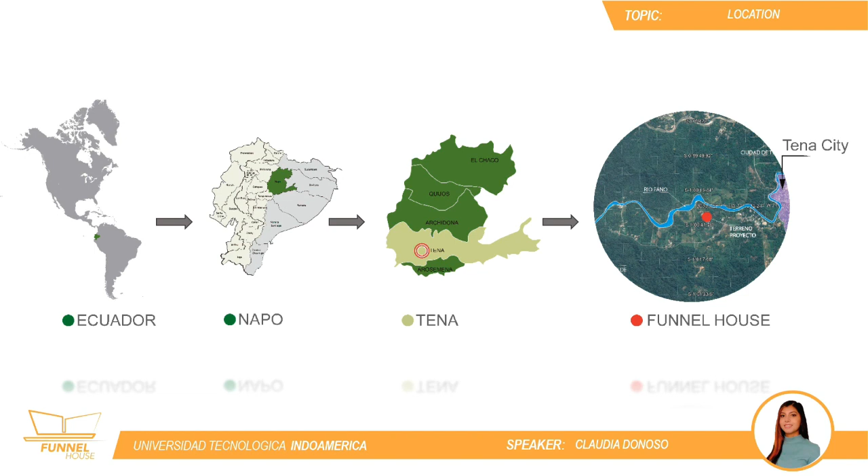Funnel House is located in Ecuador, in the Amazon region, Napo Province, Tena Canton, Pano Parish. The lot is located 4 kilometers away from Pano Town and 4 kilometers away from Tena City, right in the middle of both. This project enjoys a privileged location, surrounded by one of the richest ecosystems on our planet, the Amazon rainforest.

The importance of this ecosystem has led us to think more closely about the environmental impact that the construction industry can have. The borders of the Amazon are inhabited, with growing cities in the middle of nature. It is very important for our future to establish a sustainable relationship with the urbanized regions of the Amazon, to guarantee the protection of its natural regions.

Tena Canton is made up of one urban parish, also called Tena, and 6 rural parishes. Our project is located in Pano, rural parish. Tena Canton has approximately 60,880 inhabitants and a population density of 234 inhabitants per square mile, and a surface of 1,507 square miles. Population settlements are scattered and small, settled mainly along the banks of the Napo River and on the outskirts of the urban parish of Tena.

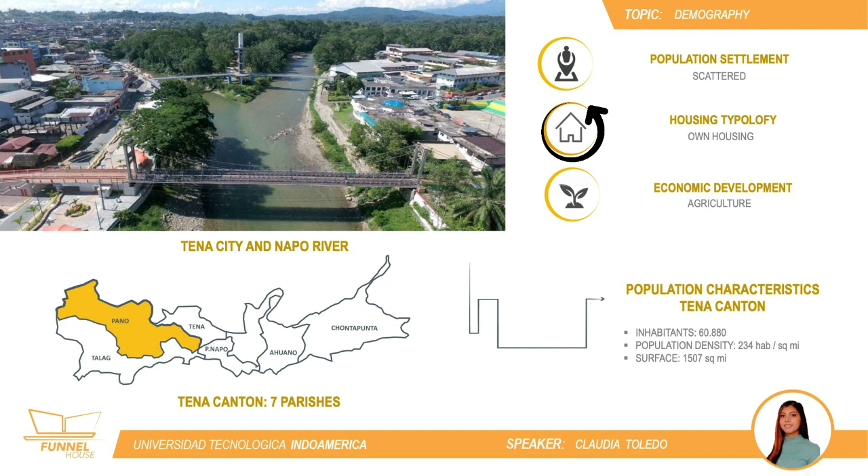Its economic structure is based on agriculture. In the image, we can appreciate the city of Tena, crossed by the Napo River. The population in Pano is mostly young. Around 80% of the people are between 15 and 45 years old, being an important potential client for housing. The families are patrilocal, meaning that the wife moves into the husband's parents' house and is considered a part of that family. For this reason, our project has a progressive growth potential.

More than half of the families in the sector own a house, for 3 to 4 dwellers, which represents a significant market potential for our design and an important chance for its replicability. The following image shows an average house in Pano. 81% of the roofs are made of zinc plates, and 78% of the constructions are made of wood. The cost of this 1,200 square feet house ranges its price from $36,000 to $48,000. We should consider that this type of house does not meet the environmental quality and comfort standards.

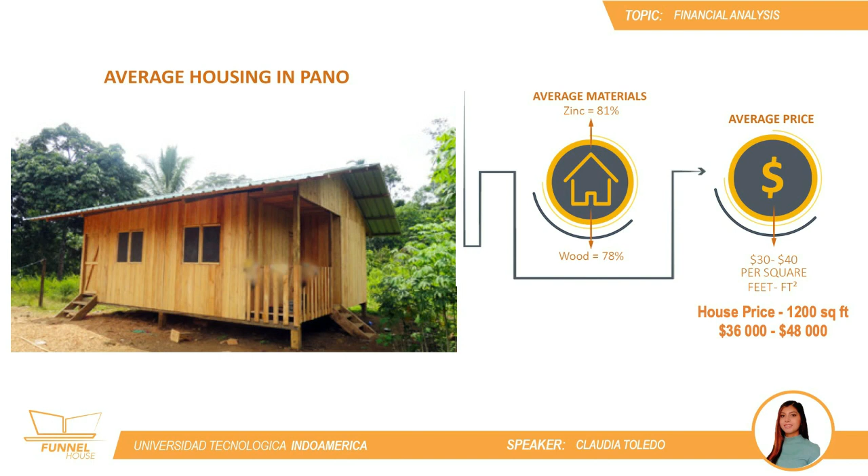Our team carried out 80 surveys with potential clients in the project's area. It was determined that the majority of the potential clients, 65%, are willing to pay between $70,000 and $110,000 for a 1,689 square feet house, the size of our project. After the analysis, it was concluded that an average dwelling in Pano does not meet the needs and characteristics of its clients. Also, our potential clients are willing to pay more for a house with better conditions.

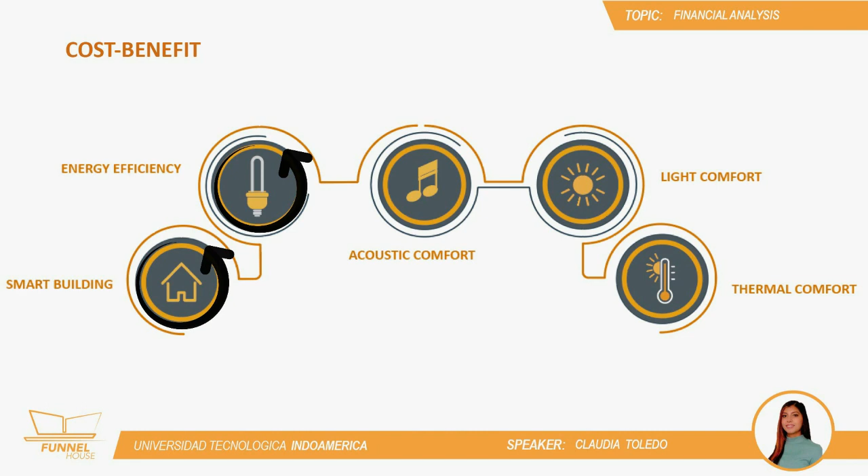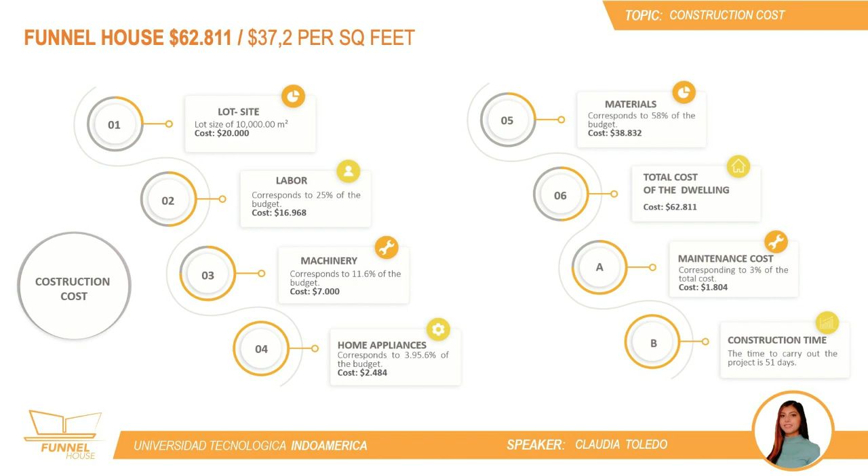A detailed budget calculation of our project was performed, establishing a final cost of $62,811, $37.2 per square feet. This includes lot, labor, construction, machinery, appliances, and material costs, shown in the points 1 to 6.

The design process included 4 phases. First, the environmental and user conditions were analyzed. In the second phase, passive strategies such as morphology and orientation were optimized to achieve the desired comfort. The third phase included technologies analysis and implementation to improve environmental quality and comfort. Finally, a coherent architectural expressiveness was defined, mixing vernacular and contemporary architecture.

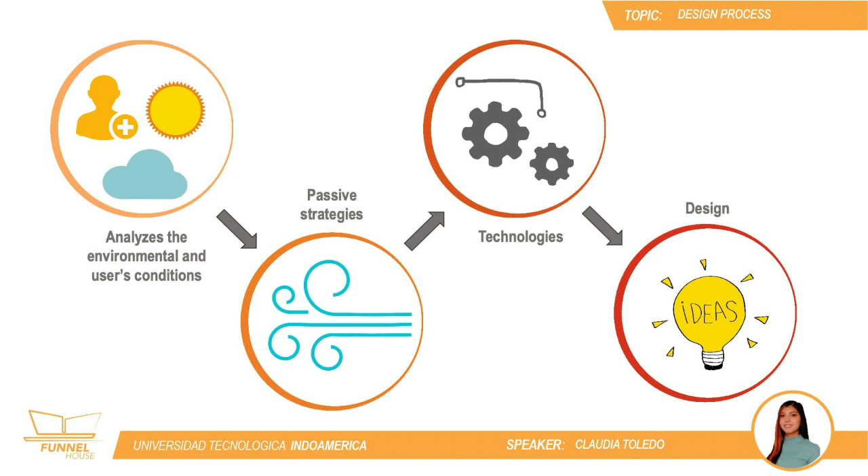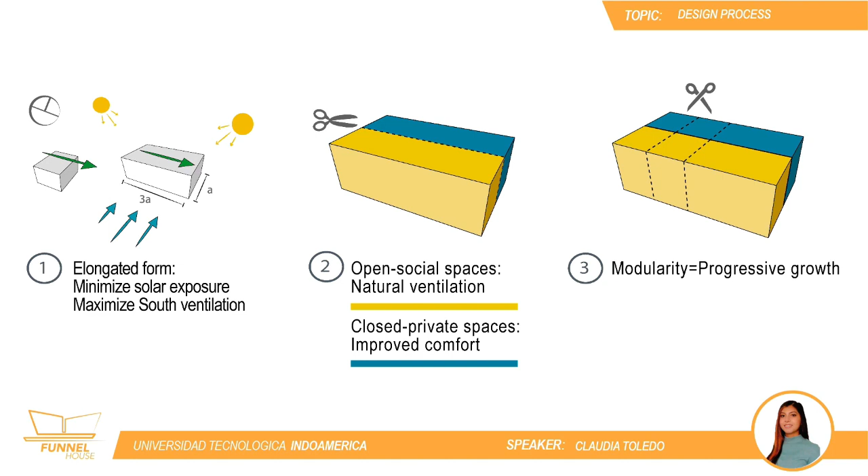Funnel House has an elongated form to reduce solar exposure from east and west. Its form also optimizes the capture of the south prevailing winds to maximize natural ventilation. The architecture program was divided into open spaces with permanent natural ventilation and closed private spaces with mechanically improved comfort. The project was modulated to allow progressive growth.

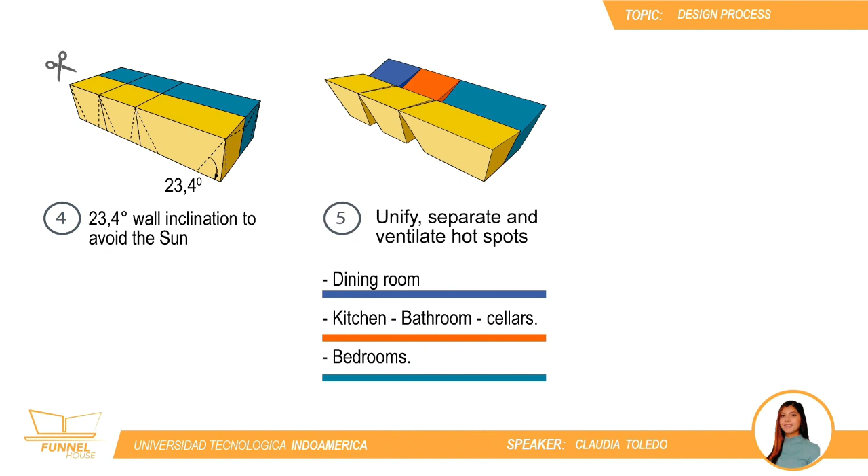In Ecuador, the sun reaches an inclination of 23.4 degrees during the solstices. The north and south walls were tilted at this angle to avoid sun incidence and decrease thermal gains. The other walls were also tilted to avoid the sun from east and west. The hotspots like kitchen, shower, and machinery room were unified into one module, separated from the others, to be ventilated and avoid heat transfer. Finally, the building was raised from the ground to allow circulation under it, avoid possible floods, and prevent the entry of wild animals.

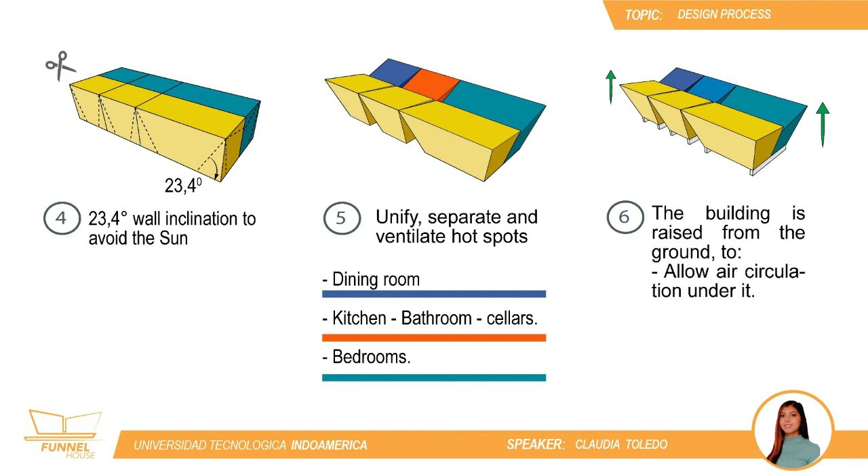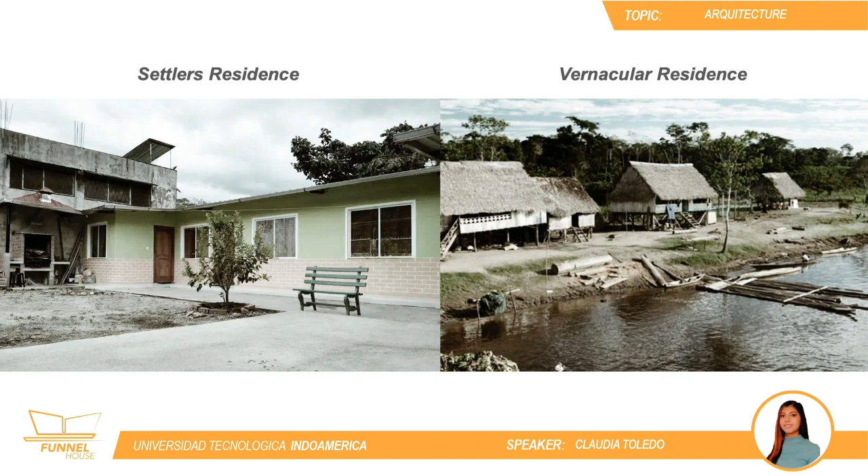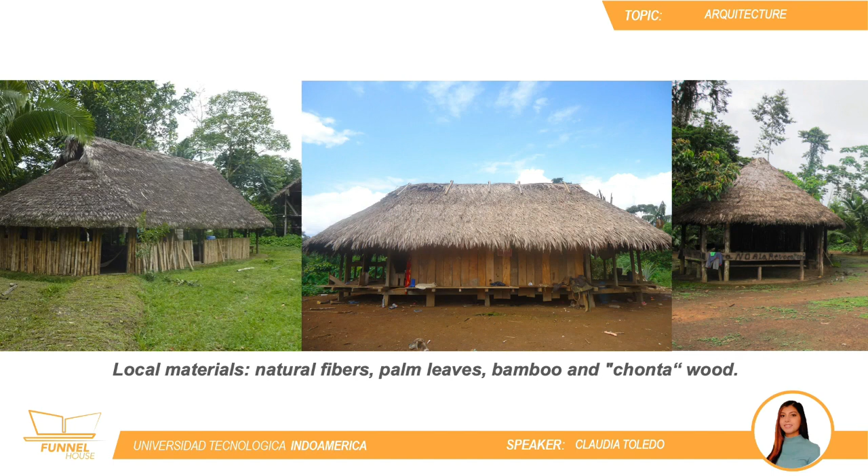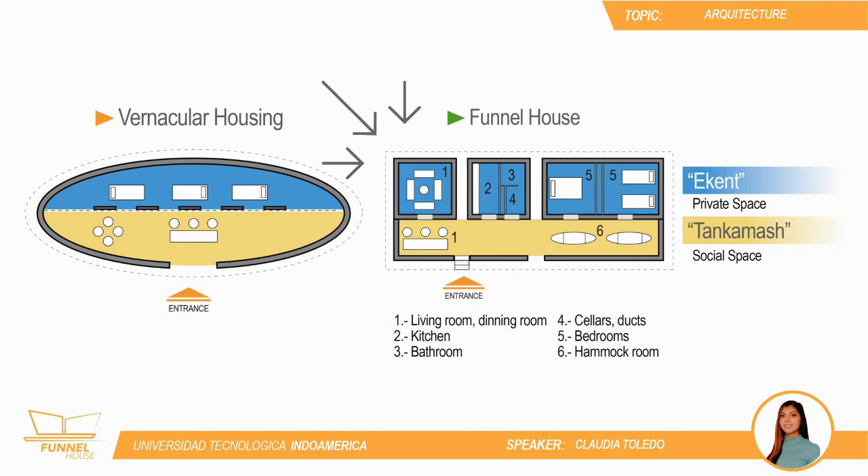Vernacular houses are built with local materials, such as natural fibers, palm leaves, bamboo, and chonta wood. The wall layers are placed vertically outwards and horizontally inwards, separated from each other to allow natural ventilation. Our project takes this idea of distribution and reinterprets it, as can be seen in the diagram on the right. In this way, its functionality adapts to the customs of the inhabitants of this region.

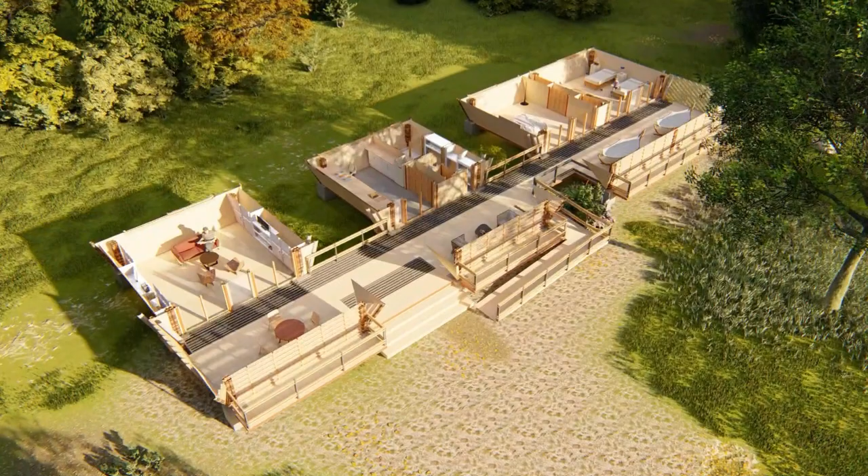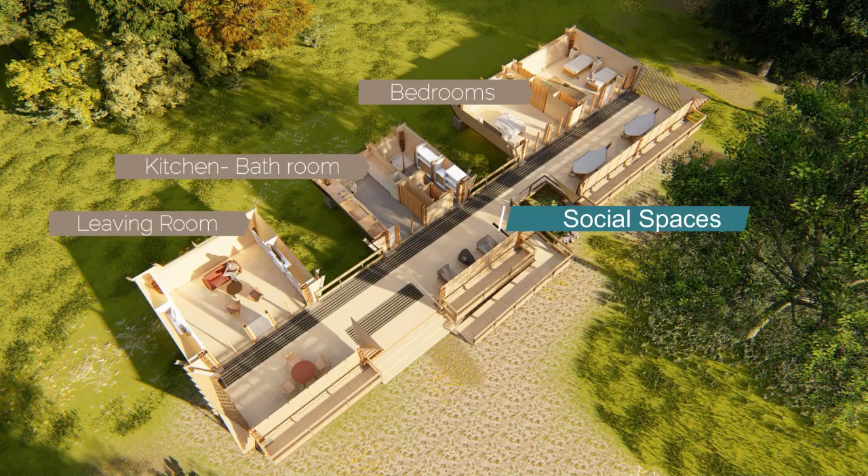Funnel House reinterprets the strategies developed by vernacular architecture. The house is divided into three modules, connected by a semi-open hall that includes circulation and social spaces. This hall also interacts with the gardens that help to regulate temperature and bring nature closer.

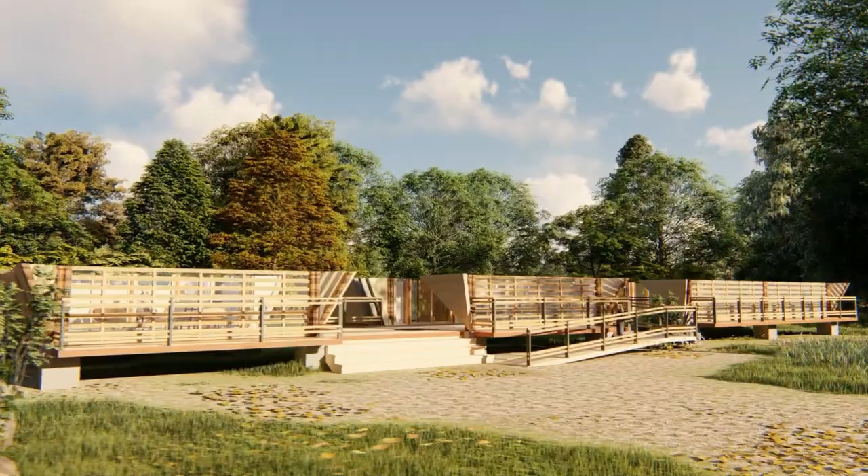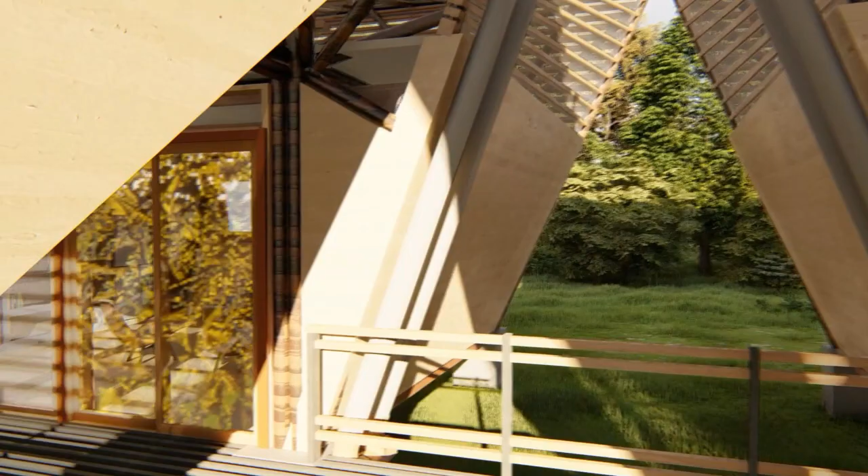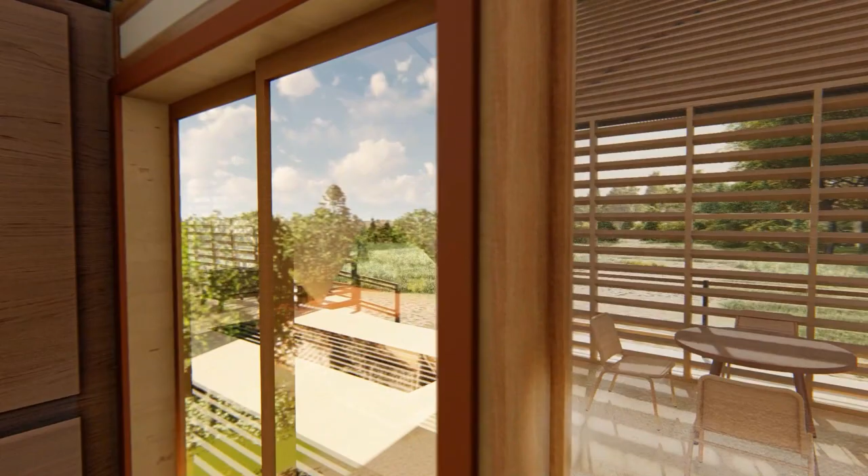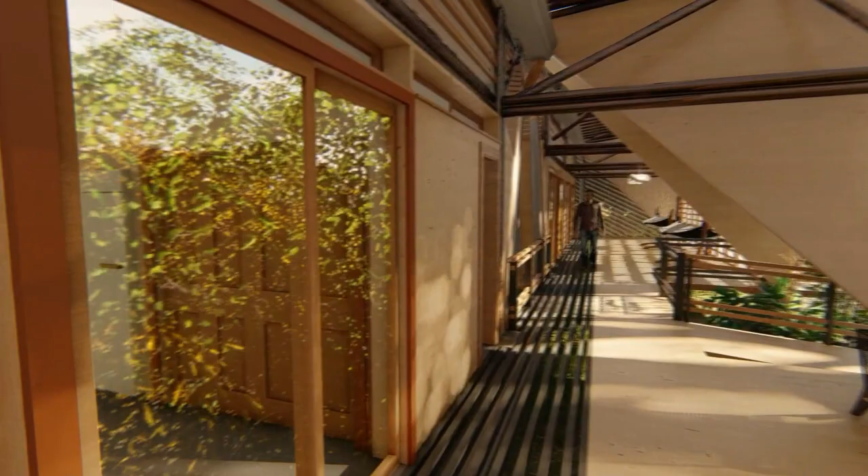The first module includes the living and dining room, located in two separate spaces that can be arranged into one to host social events. In the second module, we find the kitchen, bathroom, and machinery room.

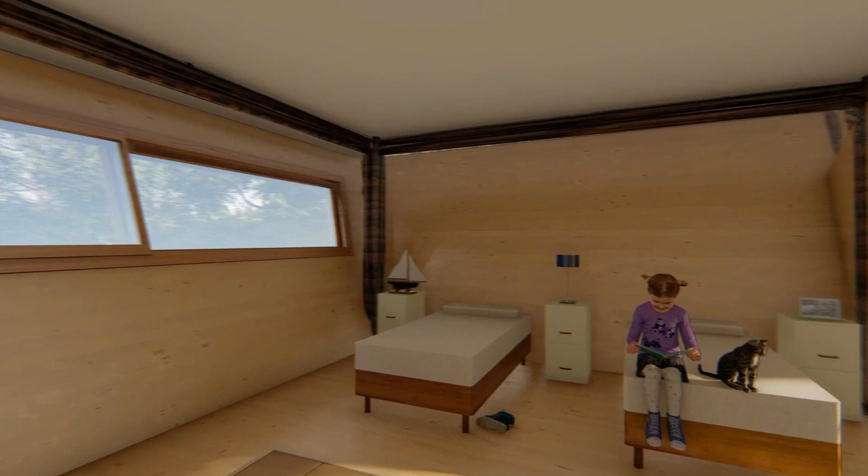Finally, bedrooms are located in the third module, each one equipped with built-in wardrobes and storage, and hammocks in the semi-open hall. The design, ergonomics, and accessibility meet local and international standards, providing an excellent occupant's experience and comfort.

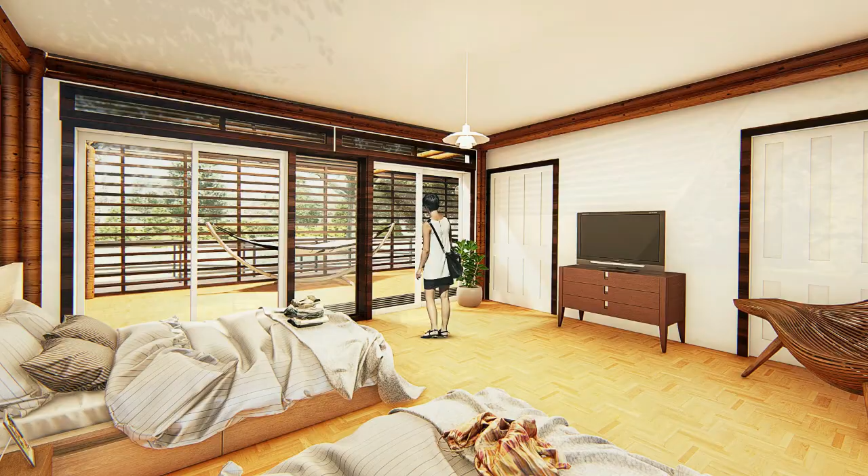Each module comprises two areas, a public area in the semi-open hall and private closed areas, isolated with several control layers to guarantee its comfort. The walls inclined to avoid solar radiation also help to accommodate the storage spaces.

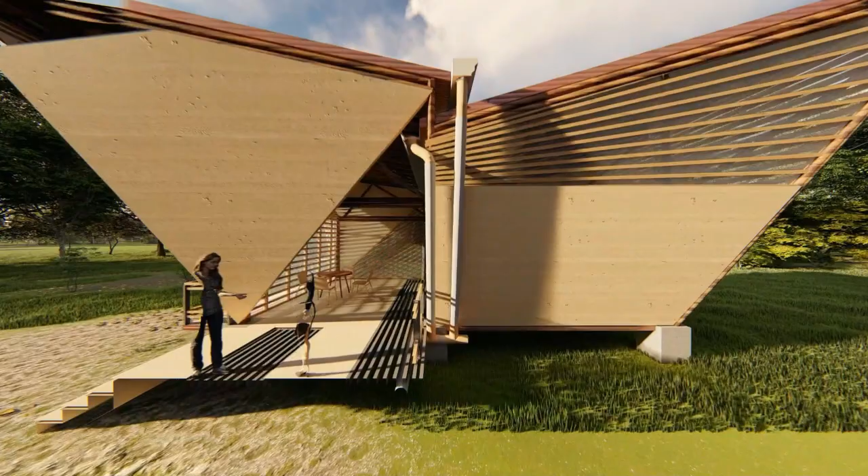Funnel House offers the highest life quality for its occupants. We used the International WELL Building Institute certification as a guide, analyzing 10 parameters. These parameters will be explained in the following sections. In order to reduce the energy consumption of the house, the project implements several passive strategies to maximize cooling.

1. The building is lifted from the ground to allow air circulation under the floor, cooling it down in the shadow. 2. The air carried by prevailing south winds is cooled down as it passes through vegetation. 3. Different vertical distances at the entrance and exits of air accelerate its circulation, improving natural ventilation. 4. Rain protection was carefully designed, allowing also rainwater collection on an underground tank for reuse.

5. The maximum sun inclination was used to calculate the inclination of the walls and the roof's eaves to prevent thermal gains due to solar radiation. 6. Cold air regulators on the ground floor allowed the entry of cool air circulating under the building. 7. Native trees surround the building to increase shading and air cooling. 8. The windows are designed to allow natural ventilation. They include anti-bug nets.

A mechanical ventilation system is implemented to reach the goal on thermal comfort. Due to the high relative humidity of Pano Parish, the mechanical system allows ventilation with variable flows depending on the humidity rate. This guarantees an appropriate quality of the internal air. The following strategies have been implemented.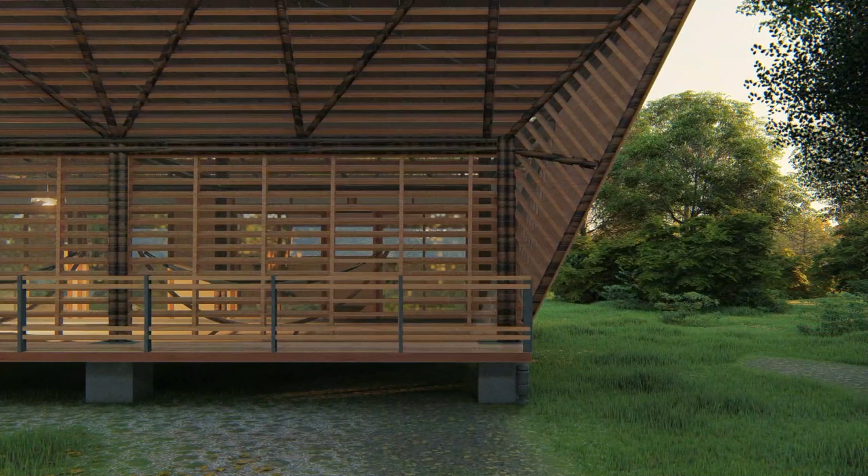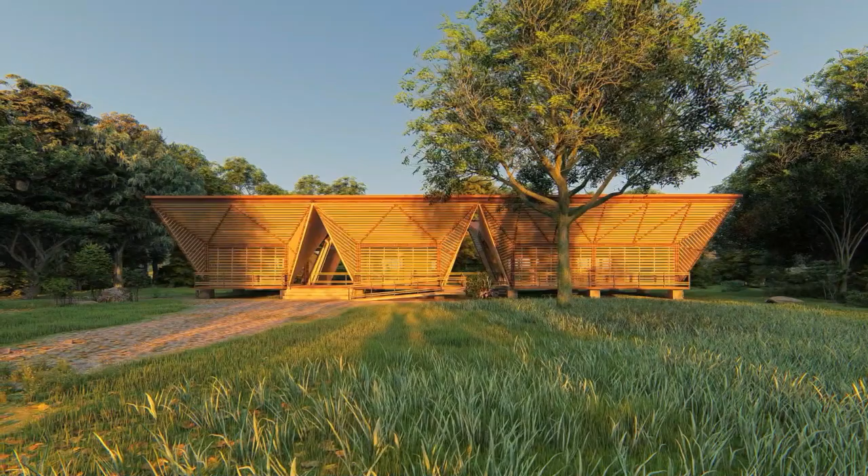The main challenge regarding thermal comfort for this project was the high temperatures and high relative humidity of Pano Parish. This solar analysis was very important to reduce its incidence on walls and indoor spaces. The wall inclination and roof eaves provide solar protection through the year to reduce thermal gains.

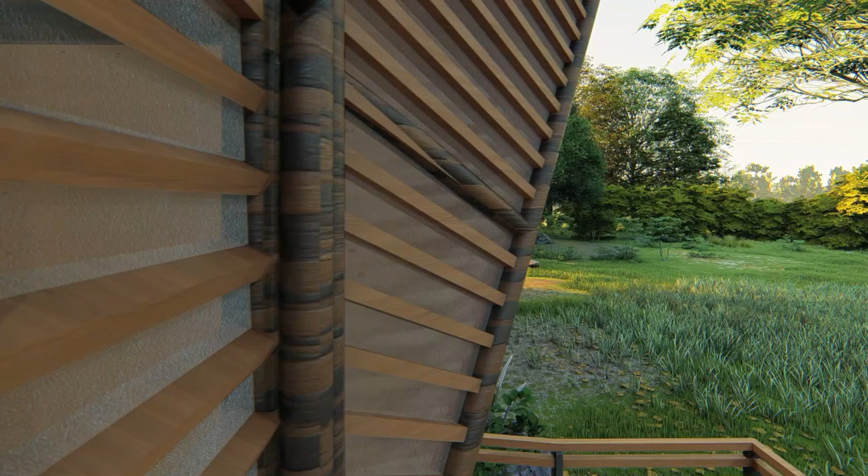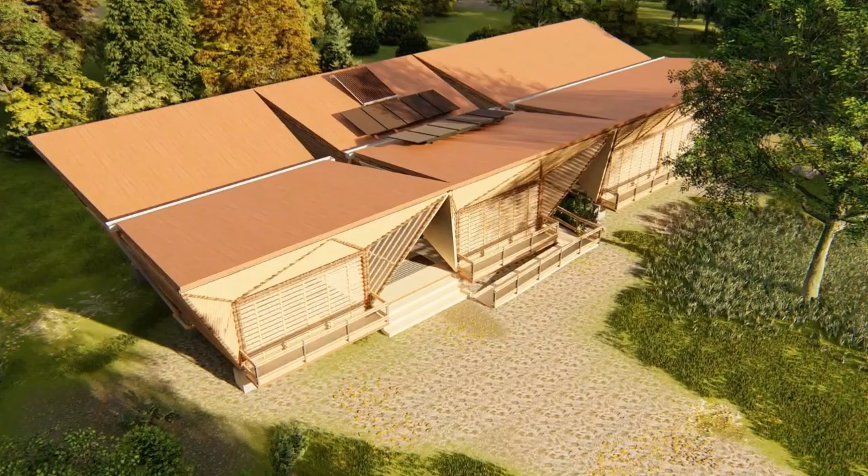Funnel House generates more energy than it consumes. Ecuador has a very constant solar irradiation throughout the year due to its location in the planet, with similar solar inclinations to the north and south. This house uses only electric energy, generated by 10 photovoltaic panels that produce 5,807 kilowatts per year.

Its energy consumption is 4,338 kilowatts per year, having an energy surplus of 1,469 kilowatts per year, which is returned to the grid to compensate the energy consumed during the night. J3M Company was a key partner to design this real market system.

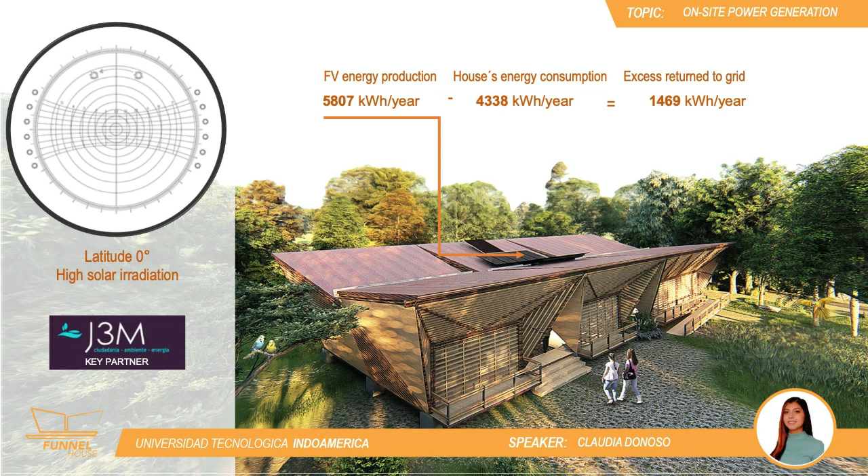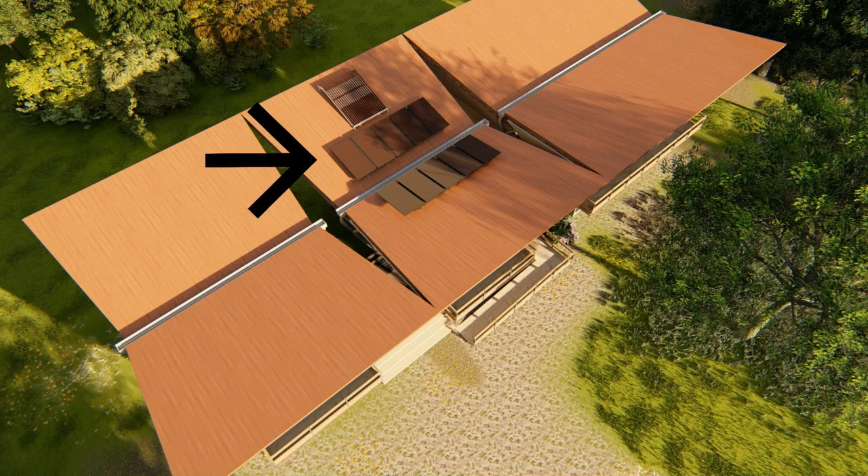The panels are equally distributed in the two roofs over the central module, with a seamless integration. The panels have an ideal 20% inclination to maximize energy production, which also allows self-cleaning by the rain. The graphic shows the energy simulation results using DesignBuilder.

Thanks to the passive ventilation systems used, it was possible to lower the energy consumption needed to guarantee thermal comfort for our users. This way, we avoided the use of air conditioning systems, which are very common in this context. The highest consumption is made by the hot water system. The desired thermal comfort inside the dwelling was defined to meet ASHRAE Standard 55.

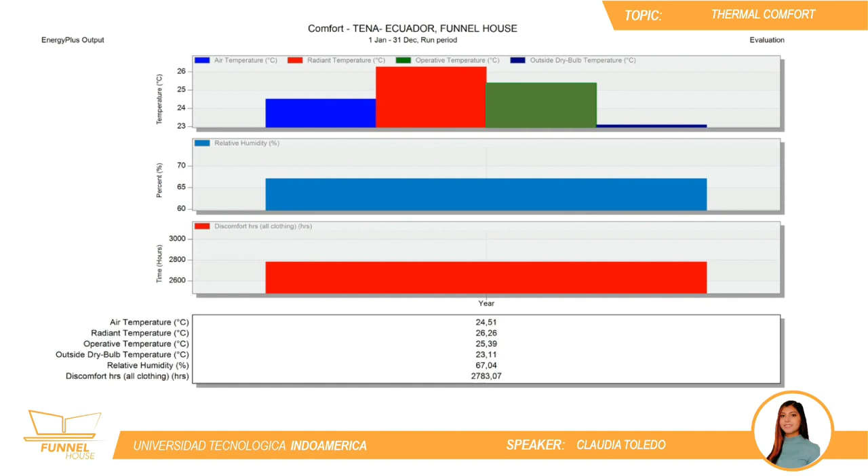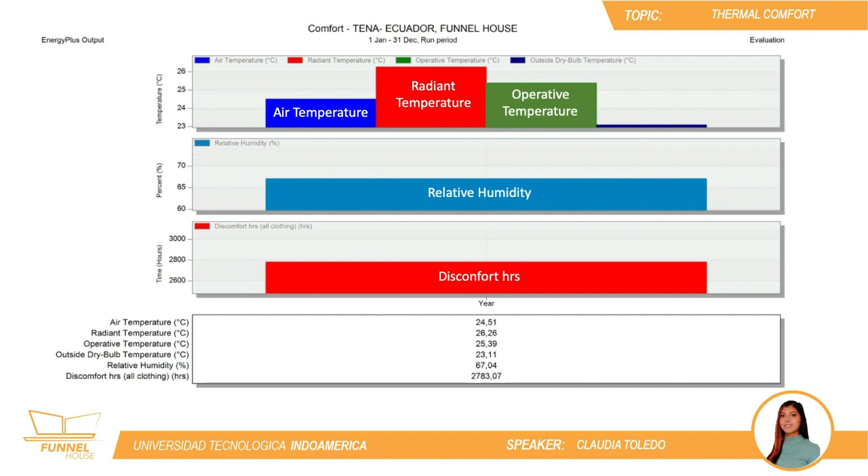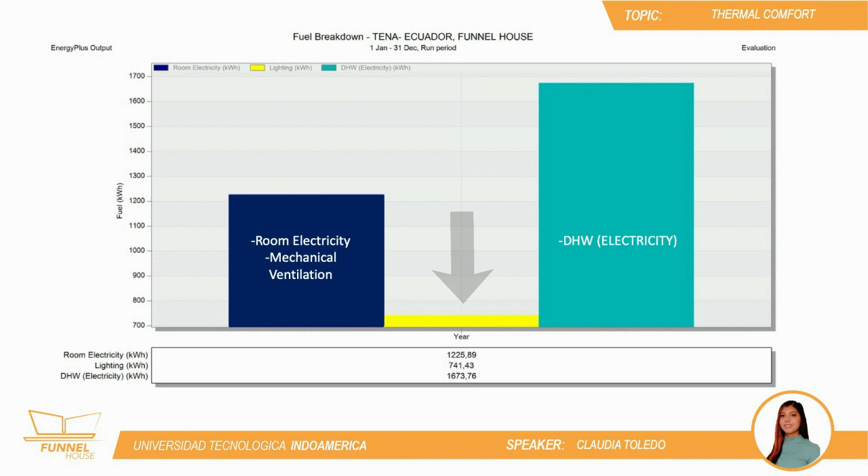In this simulation, it can be seen that an optimal operating temperature of 77.7 Fahrenheit degrees is maintained inside the home, with a relative humidity of 67.04%. Even though artificial illumination represented a very low energy consumption compared to the other systems, it was also studied to provide natural illumination for all the spaces during the day, meeting the optimal values demanded by local standards as seen in the right chart.

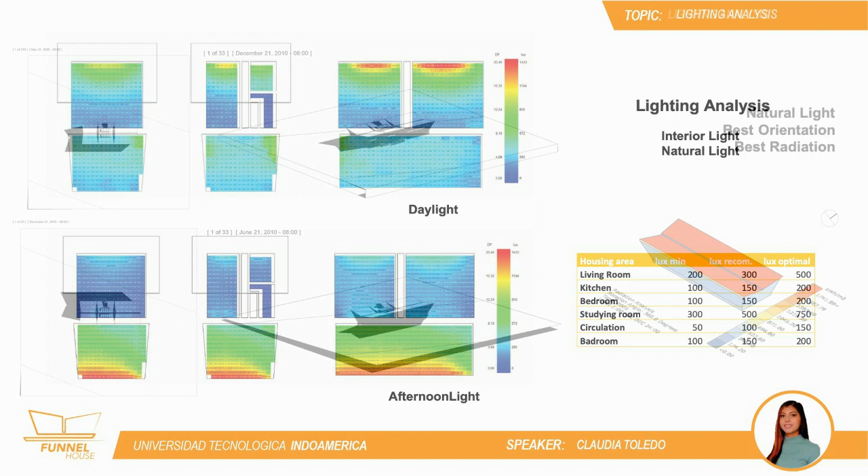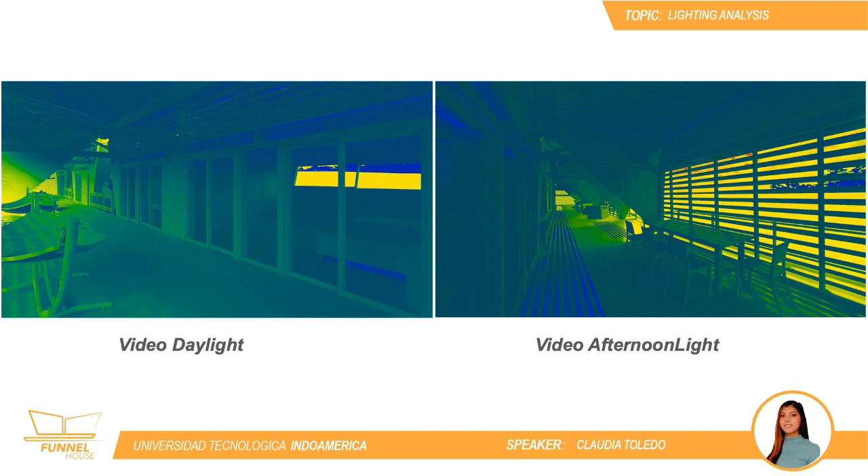The house allows indirect daylight to enter spaces through windows and blinds. The semi-open hall is illuminated and protected from radiation using blinds placed at 30 degrees, which provide natural light and ventilation while avoiding solar radiation and rains.

Pano Parish is exposed to different risks produced by nature and human activities. Resilience strategies were implemented to address each potential risk. The structural design is flexible and resistant towards earthquakes. In case of isolation due to pandemics, social disturbances, or others, the social spaces allow different uses, and the gardens include food production and rainwater reuse.

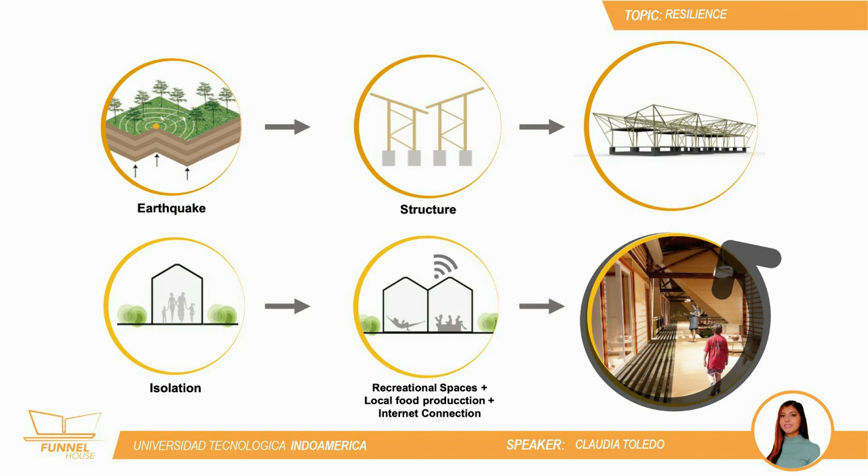The house rises 3 feet above the ground level to prevent damage in case of flooding, and the lot is located away from the Pano River flooding zone. The roof system allows water to be evacuated effectively in response to heavy rains.

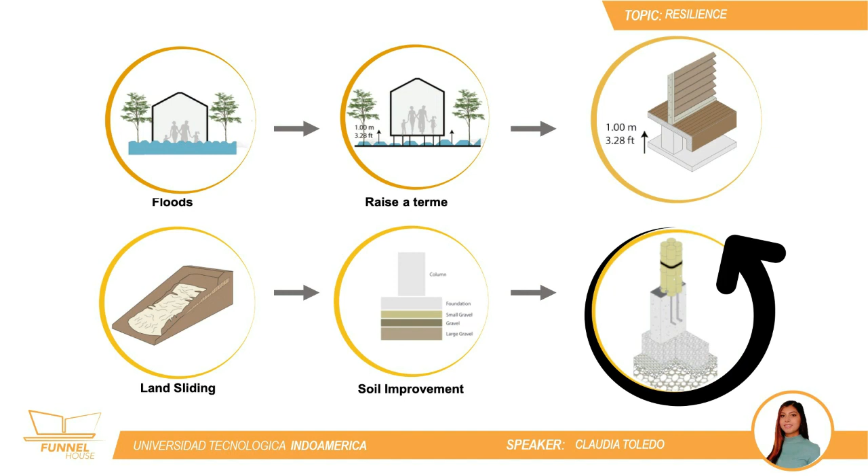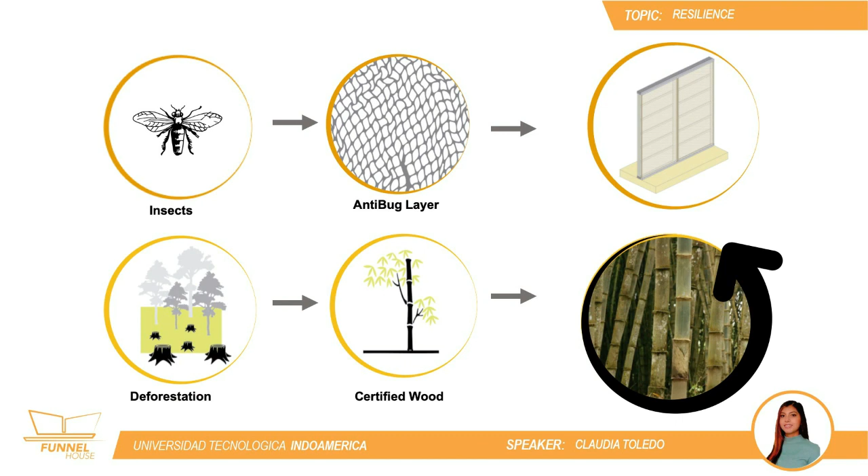The house is built over improved soil and has a continuous reinforced concrete foundation that gives stability to the land and the house. The presence of insects, amphibians, and small reptiles is very common in the Amazon settlements. The rise of the building above the ground level and the use of anti-bug layers keep these unwanted guests away. Deforestation is avoided by using certified construction woods, obtained from environmentally responsible cultivations.

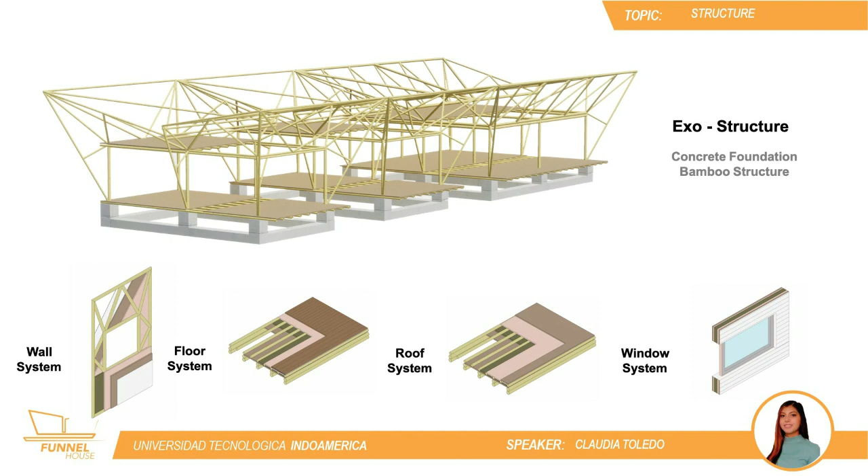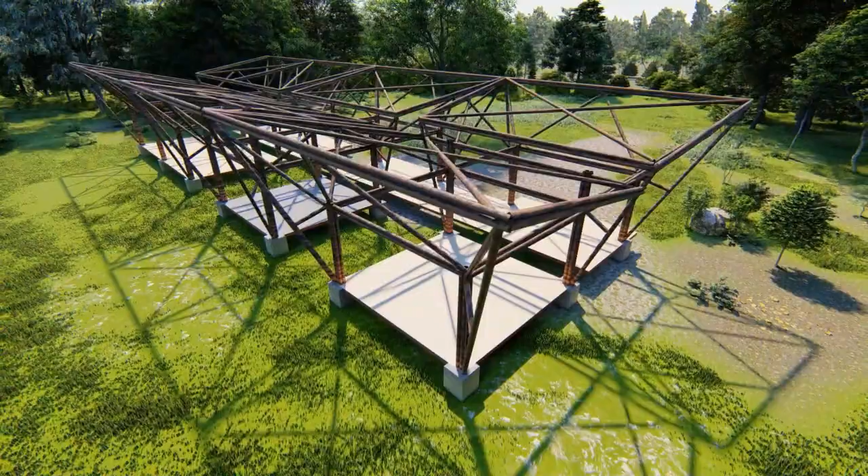Funnel House effectively integrates high-performance engineering systems and building science practices to achieve efficiency. The house has a continuous concrete foundation with steel reinforcements. The building implements a bamboo exostructure that supports the roof and the interior spaces. Secondary structures form the walls, floor, and ceiling. Windows have their own system to be hermetic. Bamboo, or Guadua angustifolia, has its own construction regulation in Ecuador, which explains the extraction process, treatment, and detailed construction techniques.

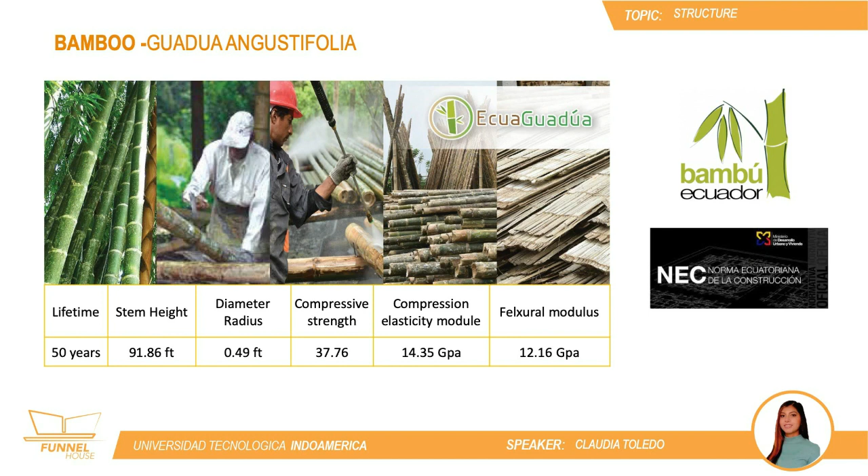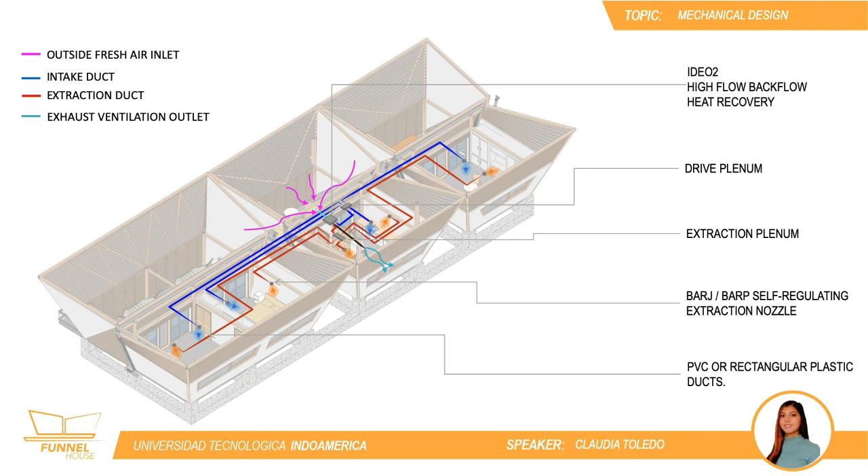The private closed spaces use an HVAC system, implemented to reduce relative humidity and ensure internal comfort, with lower energy consumption compared to the common systems used in this region. A dual-flow controlled mechanical ventilation system is used. It is made up of two subsystems, the drive system and the extraction system.

The house uses 10 photovoltaic panels located on the roof, connected to an inverter and control board, powering the house for appliances, illumination, and ventilation equipment. The appliances and equipment were carefully selected to be energy efficient and available in the local market.

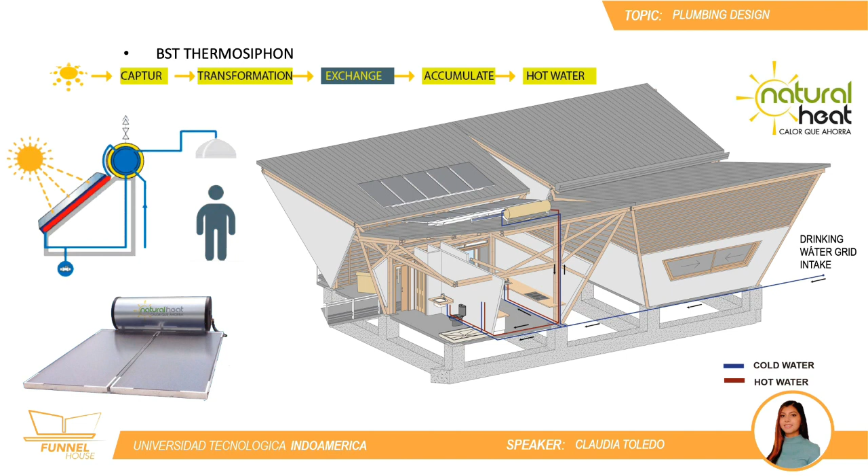The sanitary hot water is produced by a thermosiphon system with a 4-step operation. The collectors catch solar radiation. Then the solar radiation is transformed into useful heat, which is used to heat a fluid. Finally, the fluid heats the water contained in the accumulation tank.

A thoughtful water system provides autonomy and allows water reuse. The local drinking water grid supplies the house and fills the reserve tank for 5 to 7 days in case of an outage. Rainwater and grey waters are recovered, treated and reused in the toilet and for garden irrigation. The black waters are treated using a biodigester septic tank.

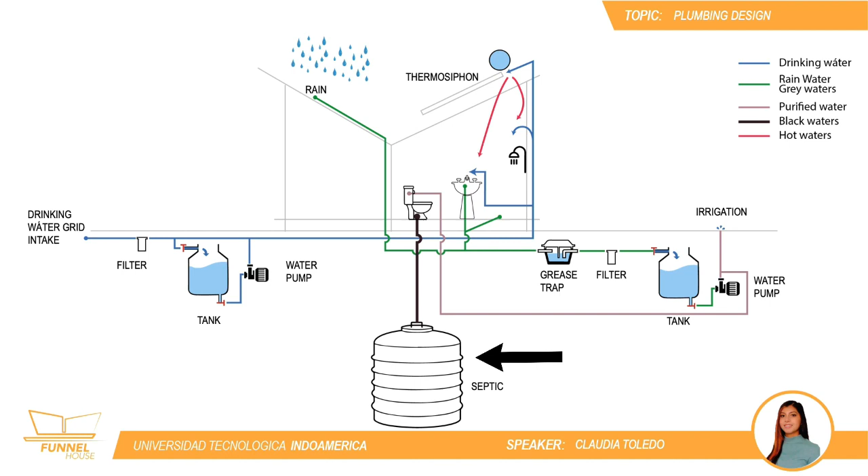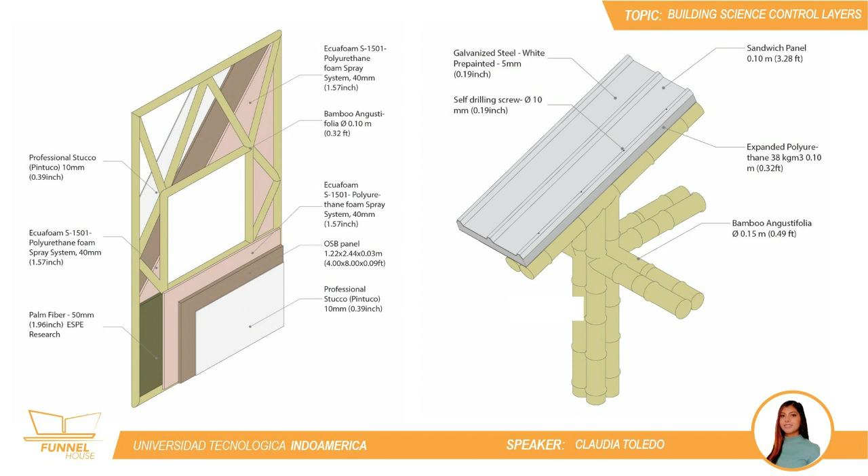The house has different control layers of protection, complying with the building science fundamentals. Walls, floors, and ceilings include a vapor-resistant layer made of polyurethane foam applied to OSB panels. Walls and floors are filled with palm fiber for thermal and acoustic insulation. The roof is made of a galvanized sandwich panel with polyurethane filling that provides thermal and acoustic insulation.

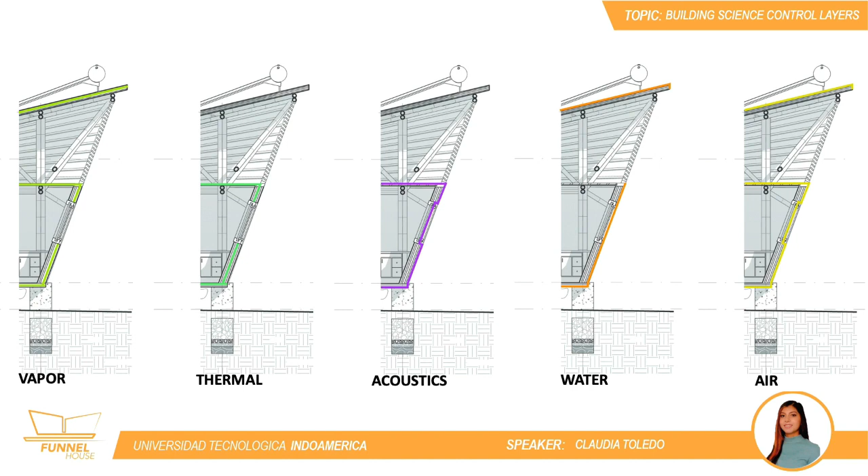The wall's inclination prevents water filtration. They finish with 2 layers of water-resistant stucco, white-colored on the outside to reduce thermal gains. The spaces and windows are closed hermetically to prevent air leaks. As you can see, the house is built with Ecuadorian materials and labor. The natural palm fiber used as insulation proved to have better insulation conditions than synthetic materials such as fiberglass or rock fiber.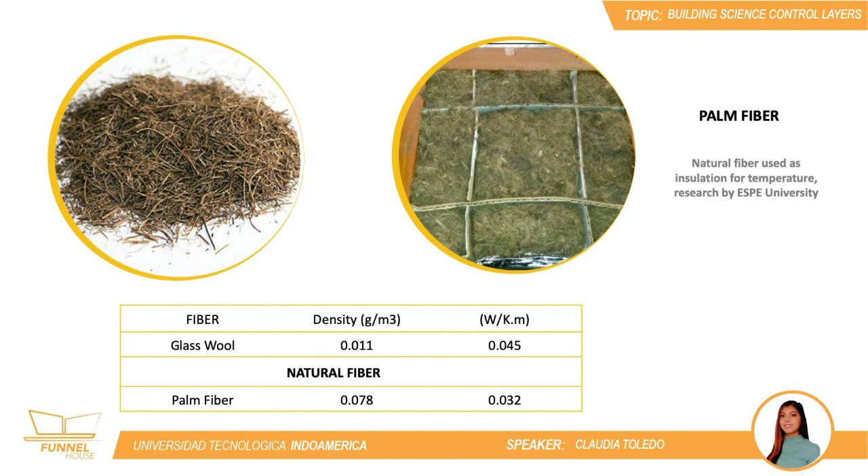Funnel House ensures efficiency in maintenance, reducing costs, time, resources, and environmental impact. The proper materials treatment prolongs their lifetime. It uses materials available on site, adapted to local environmental conditions, and local labor know-how, which reduces costs. The house also includes smart building features that allow automated monitoring. To prevent possible damages, the owner will also get a user manual for the house.

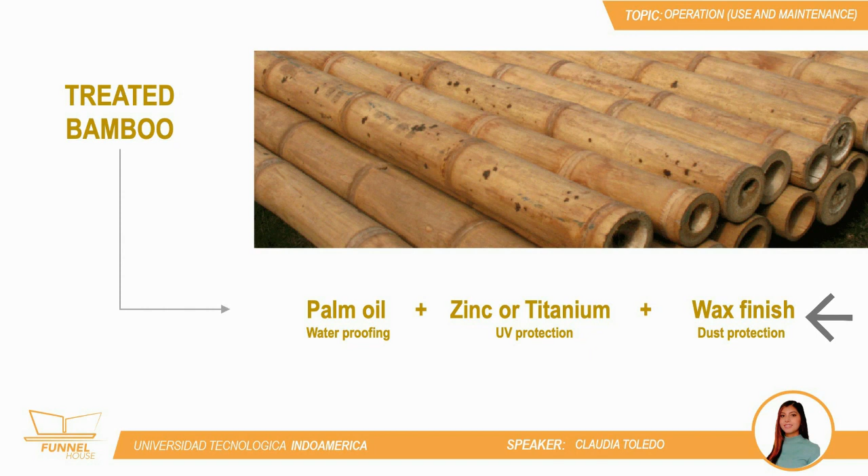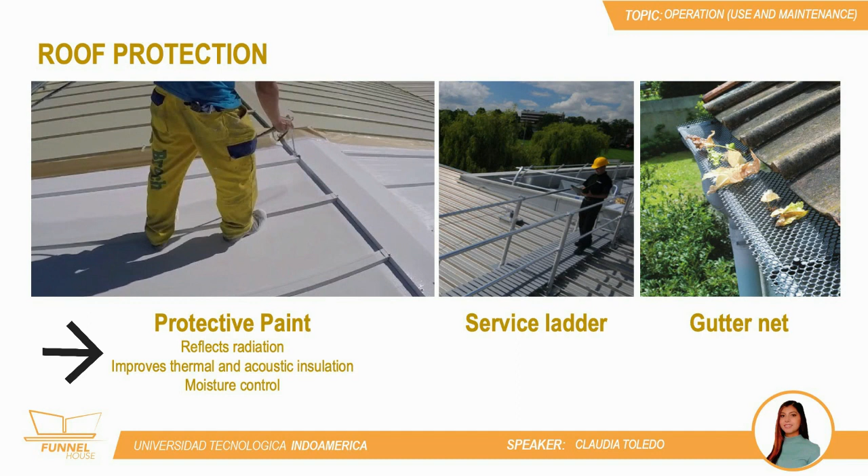Palm oil is a natural waterproofing used for bamboo pieces. It is available locally and excessive amounts are not required. To extend the lifetime of the OSB panels in the walls, a water-resistant stucco coating is applied. A reflective paint coating is applied on the roof, reflecting radiation, improving thermal and acoustic properties, and controlling humidity. The chart summarizes the lifetime and optimal maintenance time of the main materials.

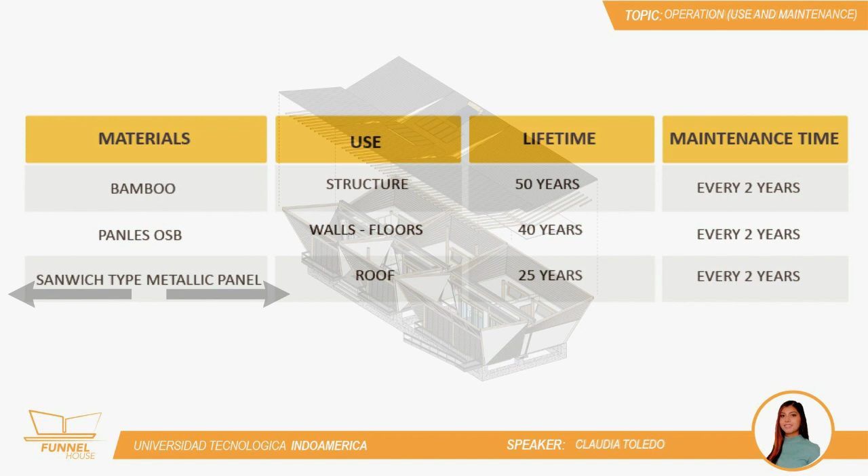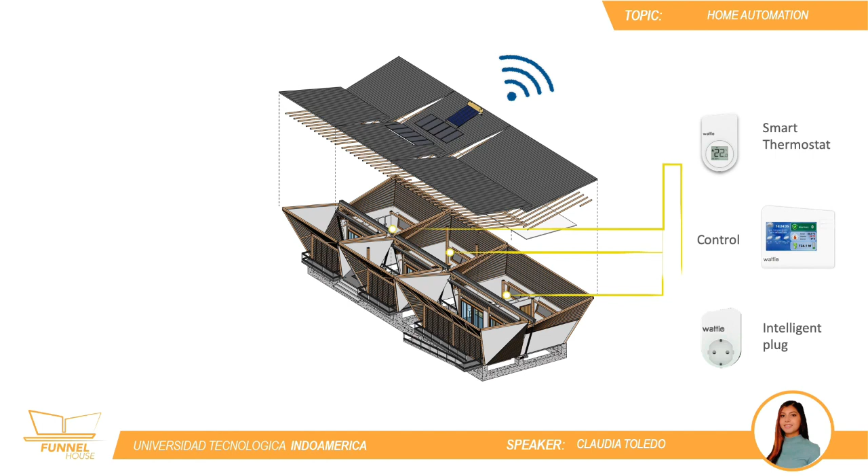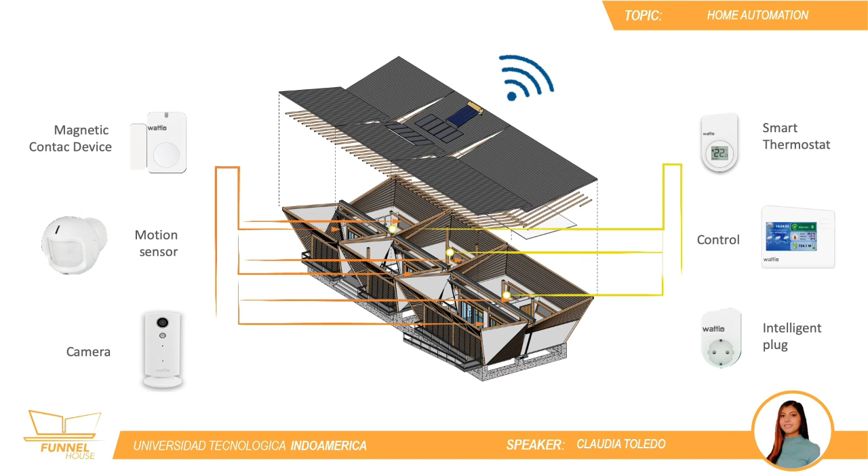All the advantages of Funnel House are monitored by a smart building system to maintain optimal performance. The smart devices can be controlled with a smartphone and keep track of consumption data for optimization. Doors and windows can also be monitored to prevent air leaks. This system alerts neighbors or family members in an emergency.

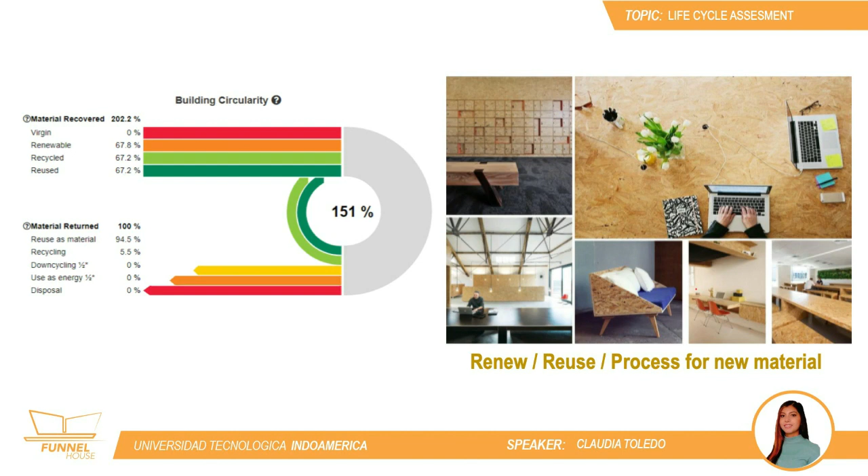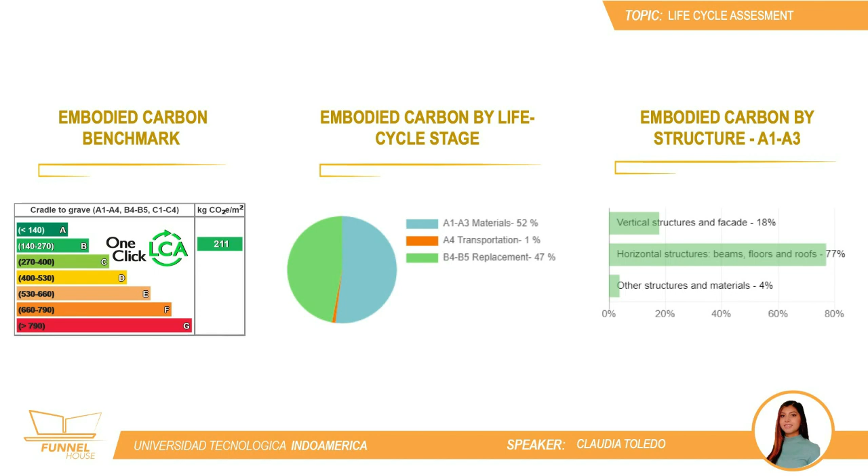Funnel House conception included its life cycle analysis to minimize environmental impact. Circularity and the value chain were determined, resulting in a material recovery of 151%. Bamboo has a great potential of recovery since it can be renewed, reused, or processed to produce other materials. Deconstruction or selective demolition of the structure is also possible, ensuring maximum recovery of all materials and components. The design was capable of reducing embodied carbon to a minimum, concentrated in structural materials and replacement, achieving a B score.

Solar Decathlon meant for us an amazing personal and professional growing experience. We are very thankful for being part of it. It was our pleasure to share with you this design journey, leading to the creation of Funnel House, a plus energy dwelling designed to satisfy its users' desire for comfort and modern quality of life, respecting local knowledge, traditional lifestyle, and helping to protect the Amazon rainforest.